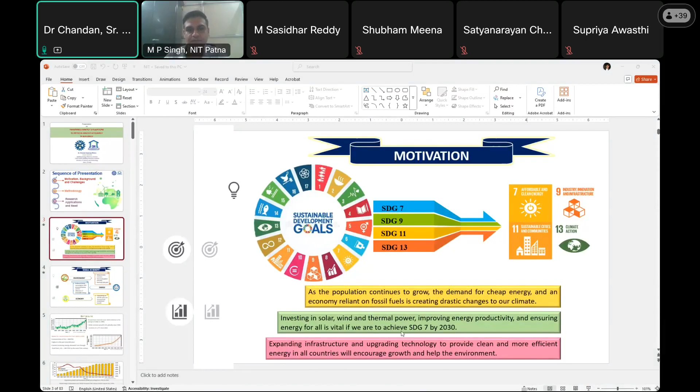Excuse me sir, your slides are not changing. I am on the motivation slide, is it visible? No sir, this is the starting slide only, the title slide. Okay, let me share again, I think there is a problem. It's working sir, but make it full screen. I have already shared, let me make it full screen, I don't know why. Is it visible now? Sir, it is visible. Are the slides changing sir? Sir, you are right now on the third slide, we are seeing the third slide - the motivation part. Make your PPT full screen sir. It is already full screen, let me share the entire window again. I think there is a problem. Okay, no issue, sir.

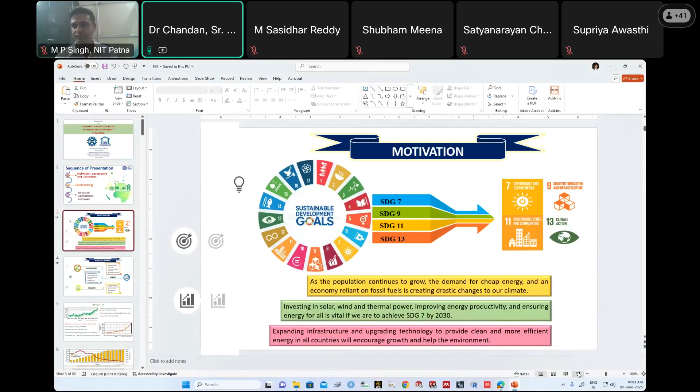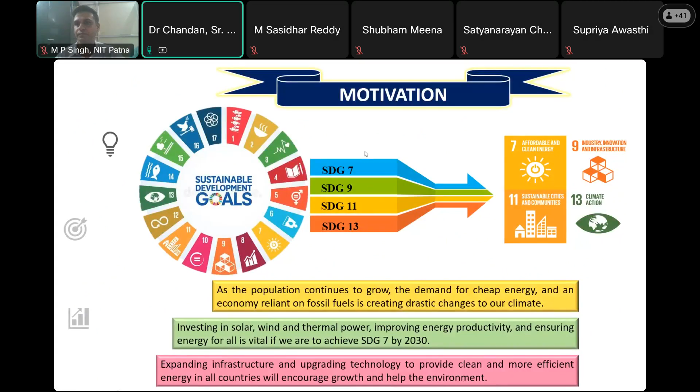So I was discussing the motivation, the area we are working in. Everyone knows the population is growing fast, so the challenges are in meeting energy efficiency and thermal performance of buildings, and how we should design buildings to reduce the heat load as well as the cooling load based on climatic conditions or climatic zones.

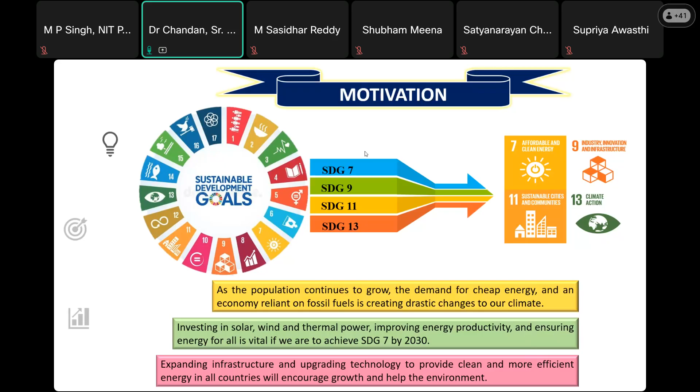These are the basic outlines where we are going. If we are trying to make changes for societal benefits, that will be a great initiative. These are the goals based on which we are working.

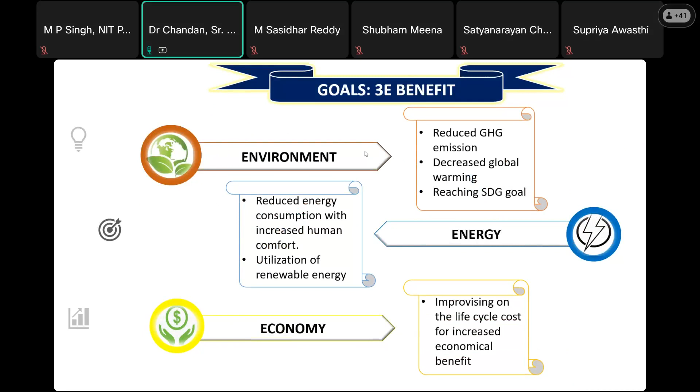That is environment, energy and economy, three aspects which usually dominate societal need. We have to take care of the environment as well as less energy consumption. Whatever appliances we use should be energy efficient, utilizing renewable energy as much as possible, which is also one step towards energy efficiency.

Another is the economy. One can say directly, before using any system, whether it is affordable. A few terms quickly come to mind before buying or adopting any kind of technology: energy efficiency, environment friendly.

In an individual manner, one can think, leave the environment aside because that's the government's duty, they will take care. The point is it should be affordable and energy efficient. Energy efficiency and economy are individual concerns, and environment, so people think, but we should not think like that.

We should also consider the environment aspect so that the building can be holistically designed, because at the start of any construction or building typology design, there is a problem of not working cohesively in the nation's development. Like, architects will design their separate building, then civil engineers will design as per their

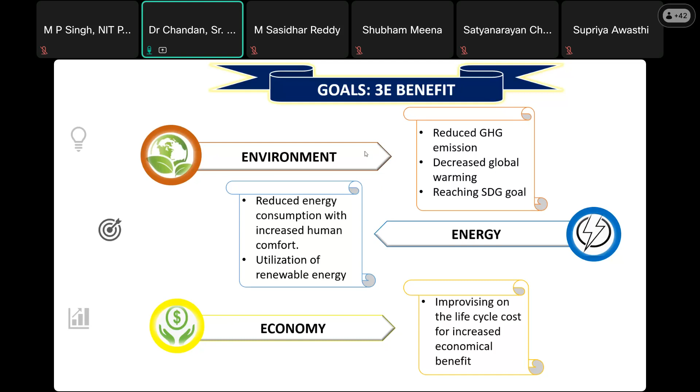codes, IS code and other things like energy, net zero. They will not take care about the energy aspect and environment aspect. So during the initial stage, we should focus on the environment, energy, and economy aspects of buildings.

These are some backgrounds already reported or available in the public domain, some facts and figures. You can see what is the status of our country, or the world as a whole, where we are lying, and if we continue consuming or growing like this, what will be the future consequences.

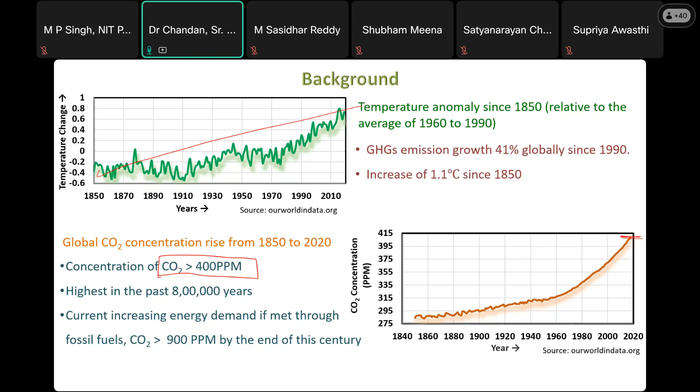All these show us reduction strategies that lead to reduced energy load for buildings, which can be fulfilled through renewable energy systems, leading to net zero energy buildings.

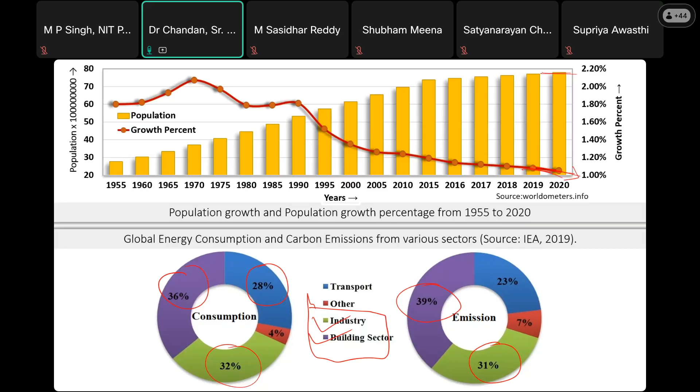So now the picture of renewable energy, because without moving towards renewable energy, we cannot even think about holistically the net zero energy buildings. So the problem is in the house and in the building, or one can say in the industry. So we are taking the domestic household.

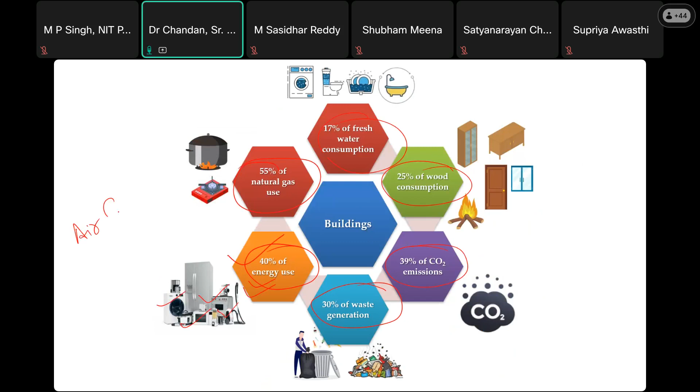One can see here, these appliances are using maximum energy, or one can see air conditioning. Air conditioning also uses 40 to 60% of the total energy consumption.

Let's take one example. In house, we have TV, fans, tube lights, AC, fridge, washing machine, mixers, and other things. So the major contributor of energy, or the major energy consuming device, is air conditioning.

Air conditioning, one can understand: in Rajasthan, air conditioning is cooling the air, and in Ladakh, air conditioning is heating the air. So in both cases, more or less, the energy consumption pattern is maximum in air conditioning. So why is air conditioning consuming this much amount of energy? What is the root cause of this thing?

So why we say that at the initial stage, we should design our building in such a way that thermal comfort in the building is maintained.

So there are two approaches: one is passive and another is active. By utilizing only the passive approach, if efficiently designed, one can reduce up to 30 to 40% excess energy utilization through passive architecture or passive strategies.

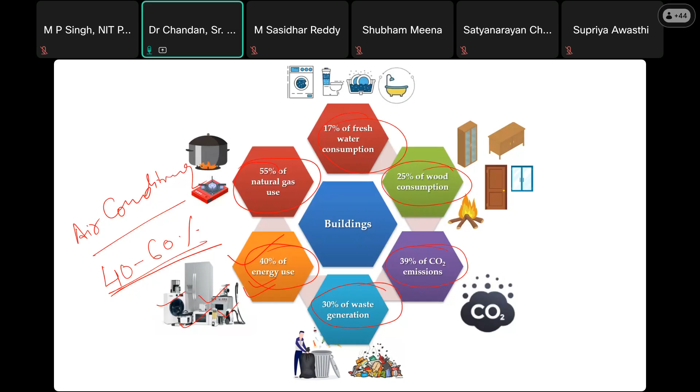This is the energy consumption pattern. I have already discussed residential, commercial, transport, and industry. So residential, commercial, and industry come under the building sector. Buildings we use for domestic purposes are known as residential, commercial, and industry.

But more or less, one can see from the peak that it is because of air conditioning, approximately 59%. That data is sometimes reported around 40. In some literature, it is given in the range of 40 to 60.

Other things one can see: lighting only 12%, refrigeration 8%, washing machine, electronics, cooking, and other appliances. These are minor, because we are intensively using air conditioners to make our space comfortable. In commercial buildings also, refrigeration and water heating are used, also in industrial applications.

But at the same time, this figure also reaches 40 to 60% if we are talking about Leh Ladakh, because there, water heating and space heating are the major contributors.

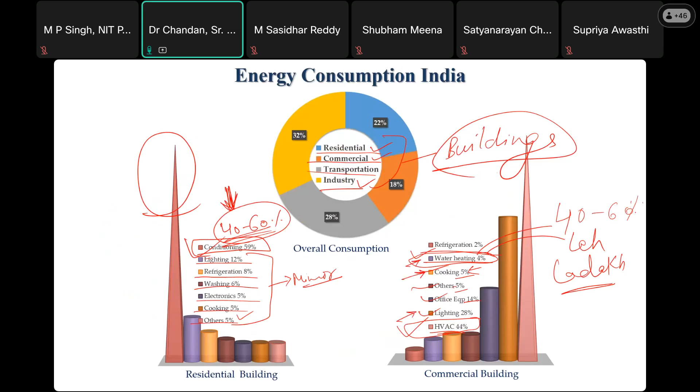But I'm not saying that saturated or energy efficient appliances are available. Still, there is huge scope to work in this area to further reduce cooking energy, water heating energy, and lighting. From previous studies, we are still in a good position to utilize energy related things efficiently.

Nowadays we are hearing about global warming potential, CO2 capture, CO2 utilization, CO2 sequestration, and like that. So how does this entire global warming potential and CO2 influence our building sector, industrial sector, transport, and other activities? How are they contributing?

Being an architect or an HVAC engineer, two terms usually come to mind: embodied emission and operational emission. The embodied emission is from material manufacturing, during the manufacturing of material and other applications, because the final product we see at our site or construction site, it's emitted during that process - how they contribute to global warming potential.

So these are the methods of reduction. At the initial stage, sustainable material. This term sustainable, everyone is using sustainable nowadays. How is this sustainable?

So that kind of material that has less embodied emission during the manufacturing as well as transportation, and the final product, whatever we are using, that should contribute less in terms of CO2. So if some material is using X, the sustainable version should be X minus delta X, at least a significant reduction as compared to the conventionally available material.

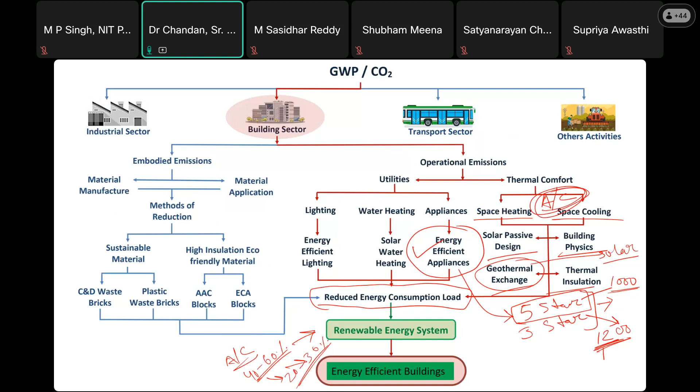Let's come to the fundamentals of net zero energy consumption building, net zero energy building, net zero emission buildings. These are different terminologies, but all contributing towards energy efficiency or NZEB, net zero energy buildings. Somewhere in literature you can find net zero energy building, somewhere you will find net zero emission building. This is more or less if we are able to reduce the CO2 and the energy.

So these both are contributing or helping each other. The other terminology that we have found in reports or journals is written as net zero energy building, but at the end all things are the same - these are not different meanings or different approaches. The total or other things are net zero energy consumption, zero carbon emission. These are the two different aspects that we have to take care of.

So how to achieve zero energy consumption building? What do you mean by zero energy consumption building? If here is the energy, there is the emission or renewable potential - one can see the renewable energy. One can say I am producing this much amount of energy through renewable sources, but at the same time I am also utilizing this much amount. Another person will say, okay this is my graph, I am producing energy from renewable sources this much and also consuming this much.

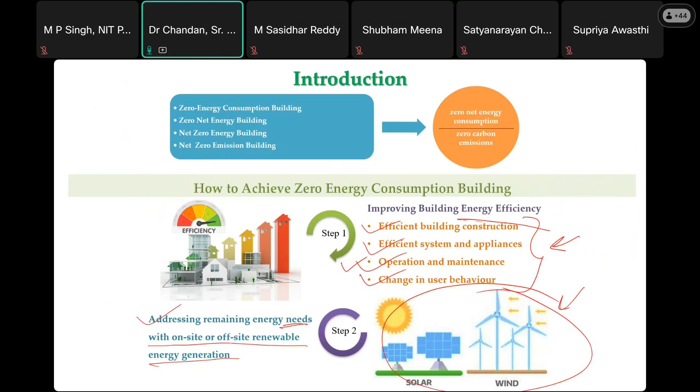So there are two basic steps I'm discussing in this particular slide. That is energy efficiency - efficient building construction, efficient system and appliances, operational and maintenance, change in user behavior. Another thing is addressing remaining energy needs - whatever remains will be taken care of by renewable energy sources. We have to think in such a way so that bare minimum energy is needed for making any kind of building space energy efficient. This is the basic mechanism, or holistic hybrid approach, so that one can make their own house or building energy efficient or net zero energy.

So there are two terms: one is net zero energy building, another is energy efficient building. First we have to achieve this energy efficiency, then we will go for net zero energy building.

So how can we achieve this energy efficiency in a building? Initially, we would apply building physics - what are the fundamentals of buildings, load optimization, how much the building is utilizing or consuming, that may be appliances, equipment, and other things, by utilizing star-rated or energy efficient appliances. That may lead to improving energy efficiency, energy efficient systems, or energy balance.

Energy balance of renewable energy as well as the bidirectional meter. There are so many approaches and appliances coming in the market. They give live data as well as live performance of the building - how it is producing, how it is taking from the grid, how it is giving to the grid, and the entire data management the devices are doing.

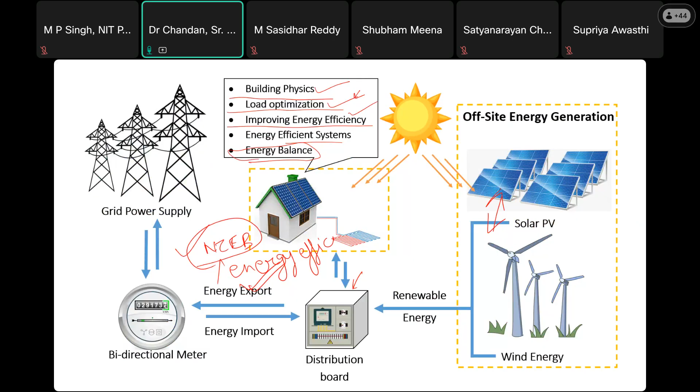So this is the final or holistic approach, one can say the user target.

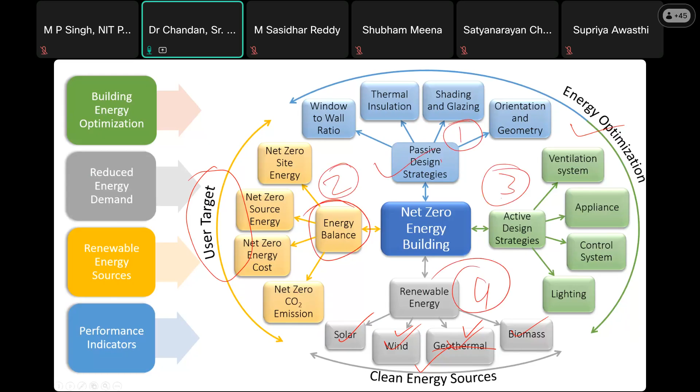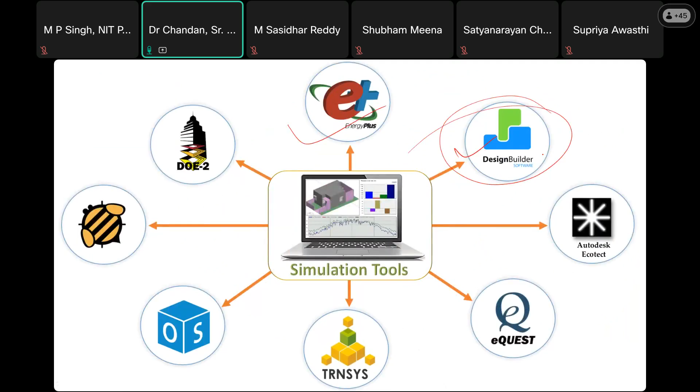There are different simulation tools, as depicted in this thing - some open source, some license based. So I am showing one simulation based on the Design Builder software. This is just a case study, not in depth - I have not shown the details in these slides.

So this is assessing building energy efficiency - how it's Energy Plus based, this Design Builder modeling simulation software. The energy assessing tool enables the user to work with a virtual building model. Complex designs are made easy with the help of predefined templates, so whatever the latest version, it has predefined templates so there's no need to invest much time on this. Predefined building materials are also available, to provide a range of environmental performance data like target energy consumption, carbon emission, comfort conditions, HVAC components, maximum summertime temperature, or daylight illuminescence.

So this is the basic data we have to collect by visiting or doing a pre-need assessment visit - what is the actual need, and how we can predefine design geometry, predefine construction material, heating and cooling design calculations, like that.

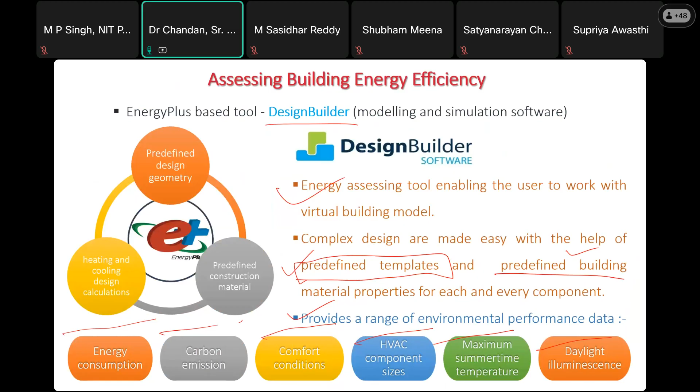So this is the study for campus only. We have data like latitude, longitude, elevation above sea level, climate, average annual temperature, Köppen classification, and ASHRAE climate zone - this is the location we initiated for this case study.

Okay, if we are taking this particular building for improving energy as well as thermal comfort, then what will be the approach? There is a permutation combination - okay, we will add this material in this wall, in this roof, in this floor area, like that. Or what is the orientation of the building, how will this building behave after modifying it. So before going for actual changes on site, what will be the approach?

How, if one will ask civil engineers, okay, which kind of insulation will you use - there is different thermal conductivity, defined thermal conductivity, U value of any sandwich panels. In CBRI itself, we have this thermal conductivity testing facility.

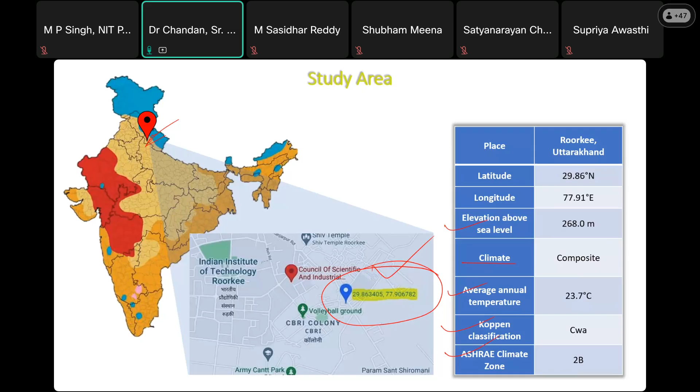First thing is site selection. Sites come under cold climate, warm and humid, hot and dry, and temperate and composite categories. If we consider Roorkee as a site, then that comes under composite climate.

Next is model preparation, basic design models. This will be the existing model, if we are going for the repair and retrofit.

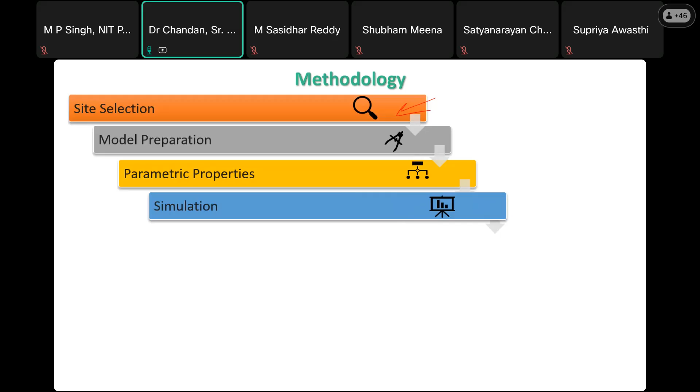Parametric properties determine which parameters will be affecting the design. Then we go for simulation, which sometimes directly gives a good combination or tunes the results with the existing one, and sometimes we have to modify it and try to improve through trial and error. This is the iteration in different properties.

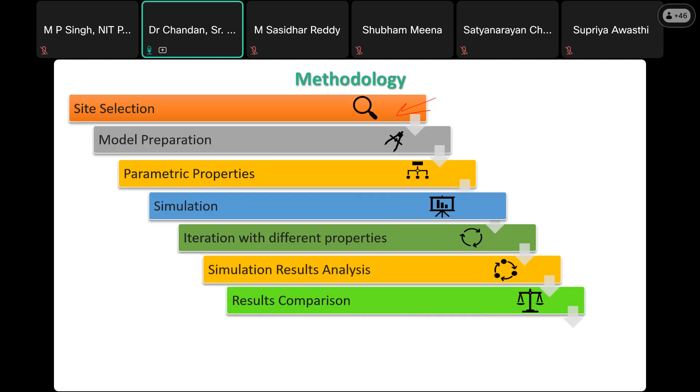Simulation result analysis - one should know how this part is done, because it is critical, and interpretation is also very important. We look at what the simulation shows versus the actual results. We have to validate our model against at least one predefined study for result comparison, and only then can the best outcome and improved energy efficiency be achieved. This is the methodology part, how we can go about it.

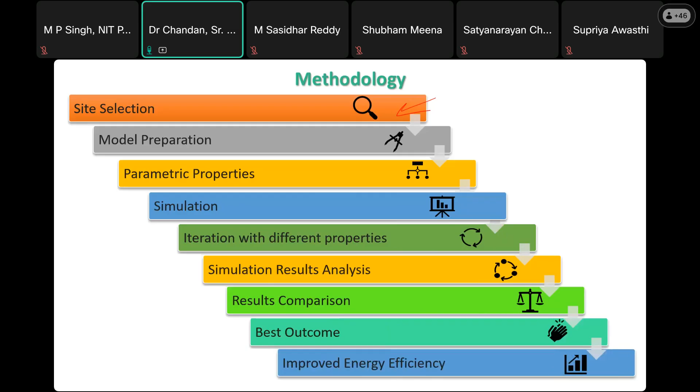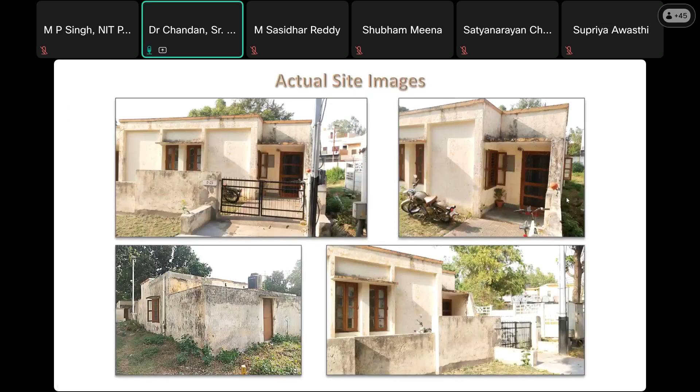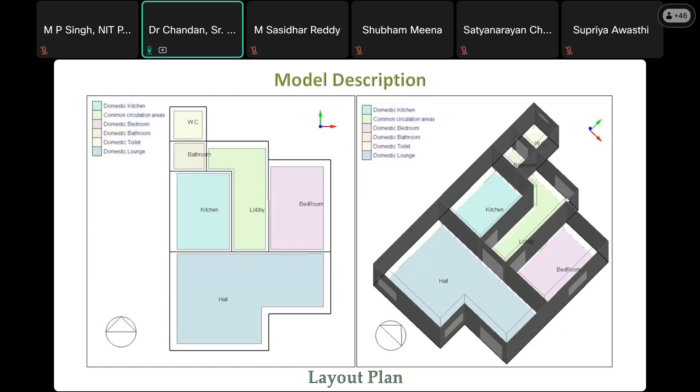We prepared this model description. This was the domestic kitchen and common circulation area, domestic bedroom, domestic bathroom, domestic toilet, and lounge. We placed other elements and created the model with the existing material, what kind of material is being used, and designed the model in Design Builder, including orientation, facade and other placements.

This quarter is placed together in a line with so many other quarters. So we designed based on the color combination and the actual thing - the floor has tiles placed in it, along with the roof, wall, and other elements.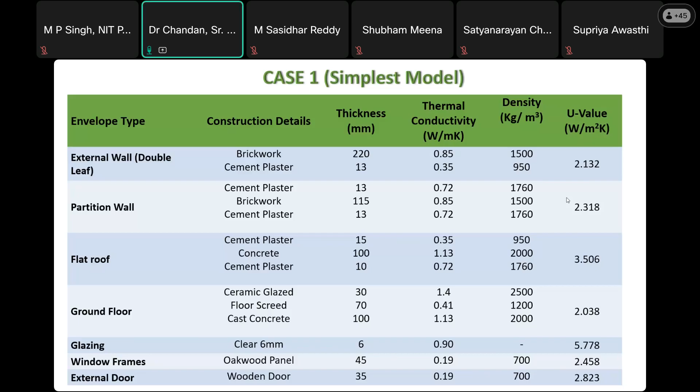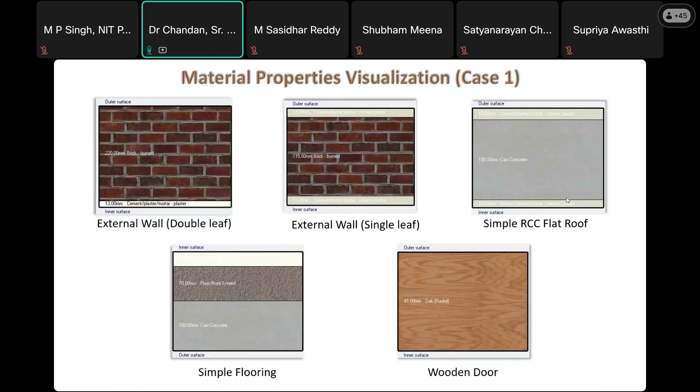These are the material property visualization for the case study. We tried to replicate the similar pattern in the simulation so it can be understood easily - external wall double leaf, external wall single leaf, simple RCC flat roof, simple flooring, wooden door. This was the rendered output of the case.

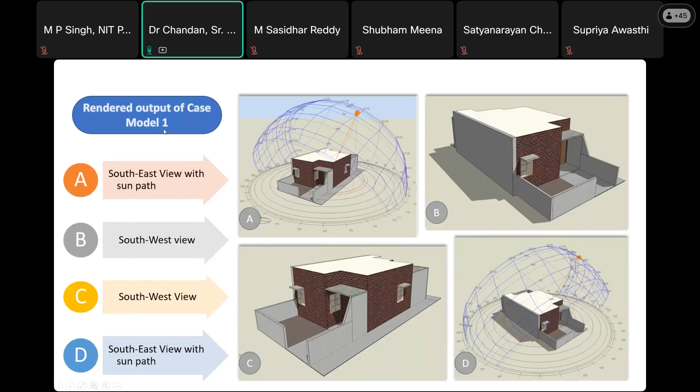Southeast view with sun path, southwest view, southwest view with or without the sun path - this is the sun path diagram created. This is the conventional model, which we modified with a few details. So this is the case study.

After the second modification, this was the second table, showing the conventional building model, with the parametric properties that are different in case 2 model highlighted from the previous model. So this is the conventional model, case 2.

As already discussed in the material visualization, the changed components shown here include the external wall of simple brickwork plaster, both faces with cement sand plaster. The roof is changed to reinforced concrete slab with cement plaster on the inner face and a layer of bitumen, mud phuska, concrete tiles, and cement plaster on the external face. The ground floor has an extra layer of brick slip and clay underfloor, with stone marble laid as the topmost layer.

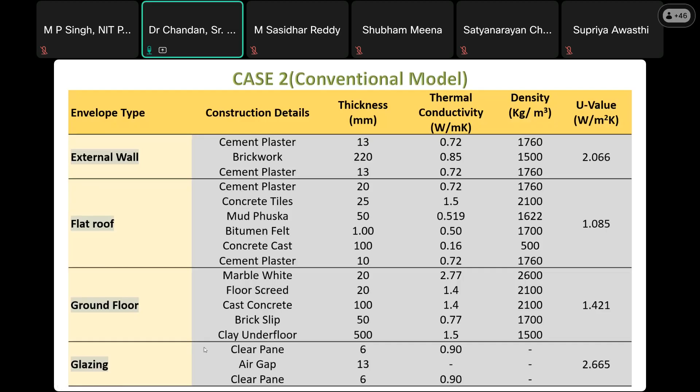So the window glazing in this model has changed to double glaze with 6 mm clear glass with an air gap of 13. Why have we put this air gap? Because air will work as an insulating material. Previously architects used to construct this rat-trap bond in which approximately 20 to 30% material saving also takes place. So like that, this is the case 2.

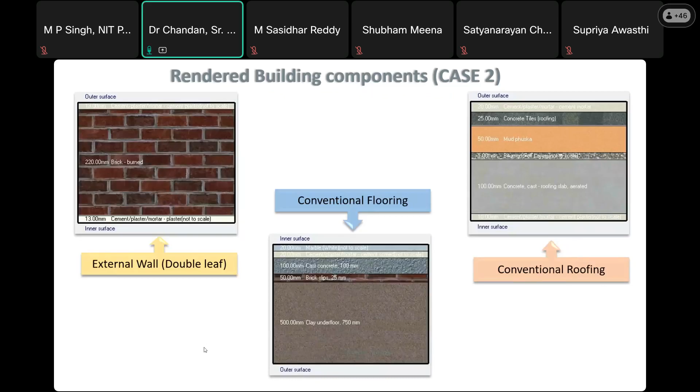We can see in the rendered images the external wall, double leaf, conventional flooring, conventional roof. Further, this was the rendered model of case 2, showing how it was improved.

This is case 3. In case 3, an additional layer of expanded polystyrene is added on the wall's outer face to provide insulation and reduce thermal transference. For this reason we added the expanded polystyrene, and in the roof section a layer of insulation with lower thermal transmittance is added to reduce the heat effect through the roof system.

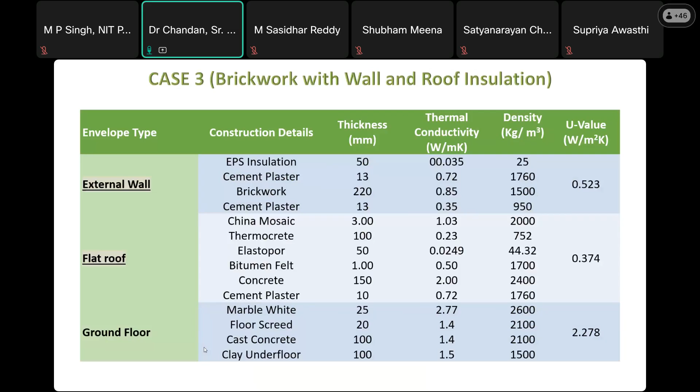You can see how we have step by step improved and checked the feasibility. So for the result analysis, the main thing I already discussed in the previous slide: interpretation and result analysis is the important part so that we can get efficient or good results. What is our purpose? Our main purpose was CO2 emission reduction as well as energy optimization. That was the main target.

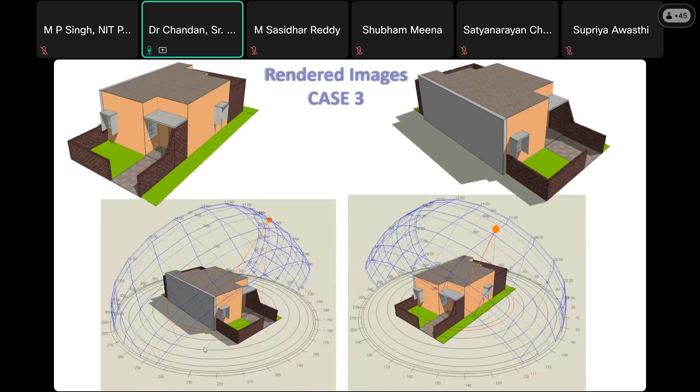So this is case 3. This is the rendered image of case 3, showing how we changed insulation and other things. In the rendered image one can see a difference in the color and flooring pattern and other things. At the end we further improved by adding brickwork with insulation inside it also, to check whether it will work or not.

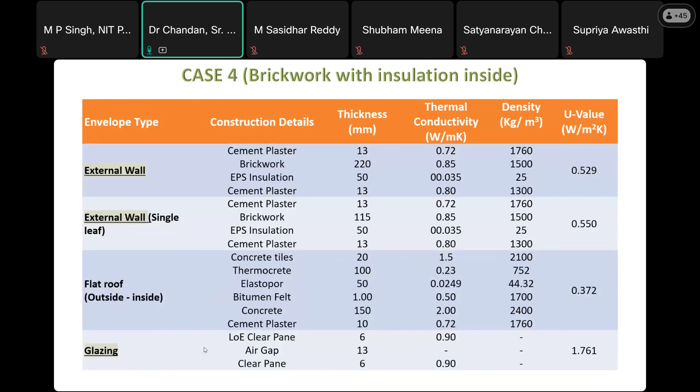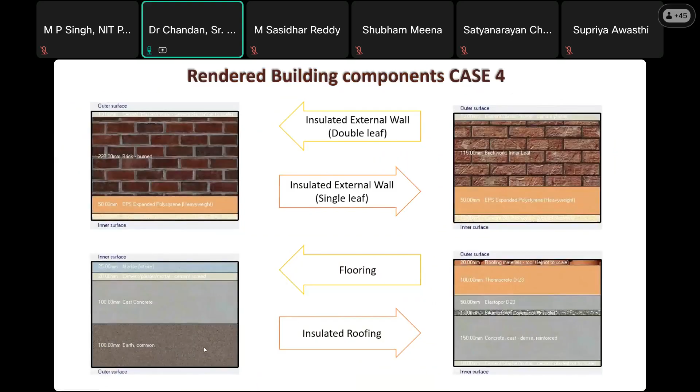So this is the rendered building component, case 4. These are rendered building images, case 4. This is case 5 - let me explain the case 4 part. In case 4, the insulation is provided at the inner face of the wall, to analyze the change in the thermal behavior of the wall by changing the placing of the insulation layer.

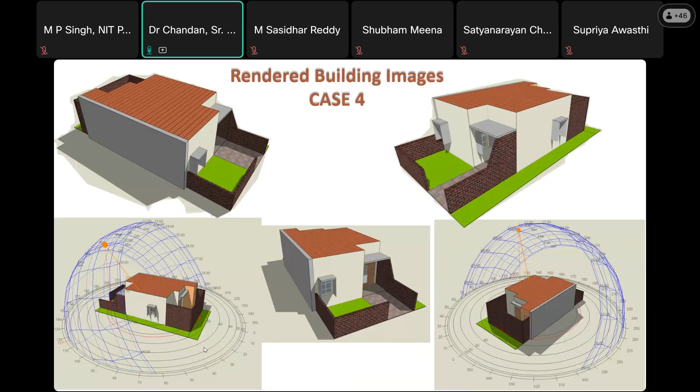In the roof section, the topmost layer is changed here to concrete tile. And in this model the window glazing has been changed to double glazing with 6 mm glass on the exterior face and a 6 mm clear pane. This gives a low emissivity effect due to the glass, which minimizes the amount of infrared and ultraviolet light that comes through the glass, without minimizing the amount of light that enters. So like that, we changed this in case 4.

Further, we also analyzed through simulation case 5. In case 5, the brickwork is changed to AAC, with no insulation layer, to see the effect of reduced thermal transfer using AAC block in the building and an insulation layer of EPS. Similarly, this was added in the floor and below to lower the heat transfer from the ground.

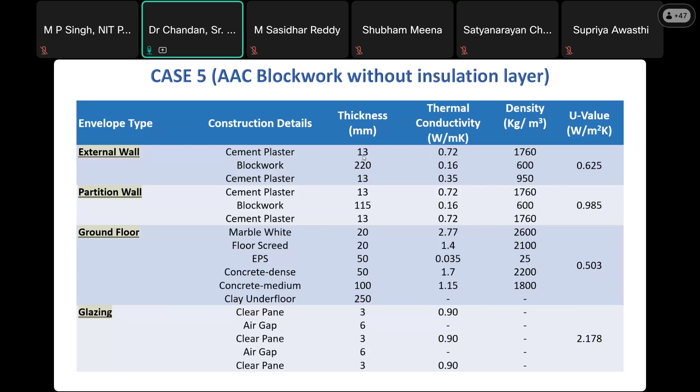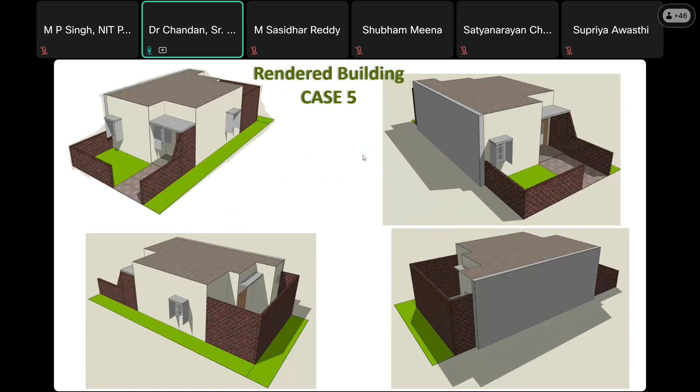And the glazing has been changed to triple glazing, 3 mm clear glass with 6 mm air gap. What is the effect of this glazing? So these are the different things we have tried - case 5, this is the rendered image of case 5. And likewise case 6 also, with external wall A and external wall B. This is a rendered image.

In this, the only modified parameter is the added EPS insulation layer to the blockwork on the wall's outer face, with lightweight cement plaster on the outer face and gypsum plaster on the inner face. One can see the color also changes based on the predefined parameters in this.

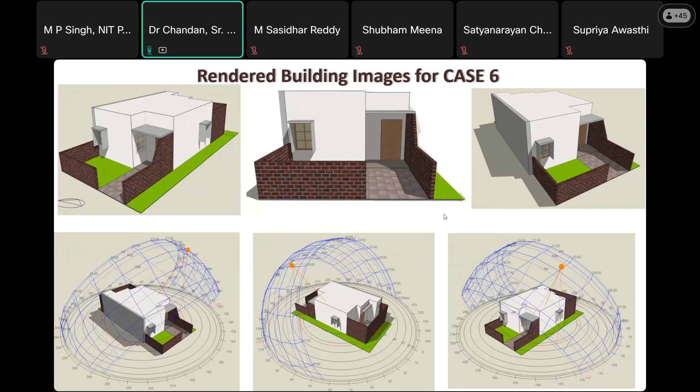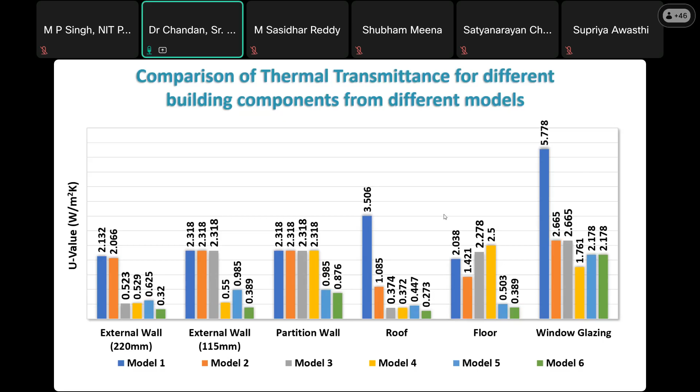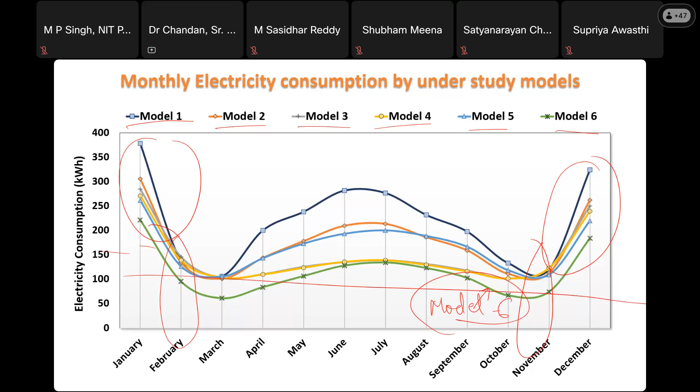So one can see definitely this energy consumption pattern of model 6 is consuming less energy. Similarly, we have also analyzed different parameters, like the effect of carbon emission comparison for the under-study building models, and what other things are affecting buildings.

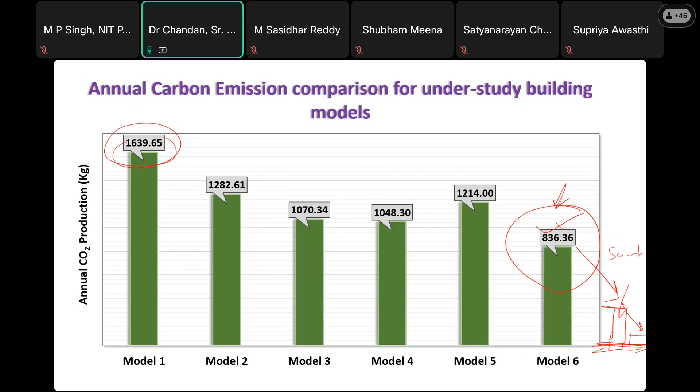So why are we not going for this kind of study or scientific intervention before designing? We are usually going with glass. In Rajasthan, placement of glass is not energy efficient, because glass has the thermal property that only allows short wavelength to pass, and it works as a barrier.

It will not allow the long wavelength to go back out. As wavelength and temperature are inversely proportional, short wavelength has high temperature and long wavelength has low temperature.

One can feel this in a car during peak summers: if you leave the car in open space in the daytime around 2 or 3, then even after traveling 100 kilometers with full AC, in a minute or so, it will be much hotter than outside.

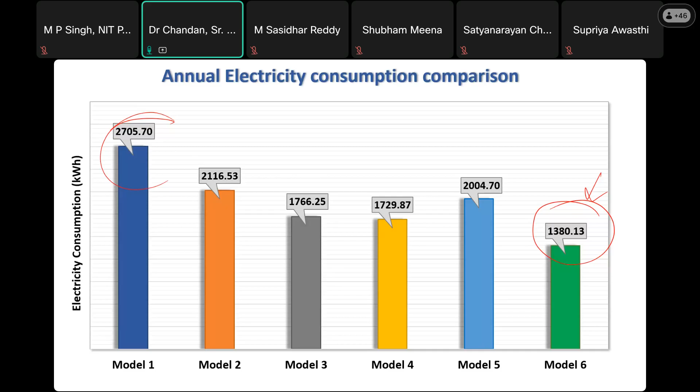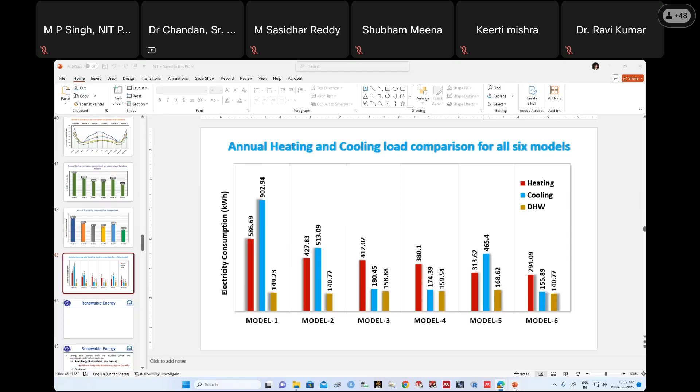This is the annual heating and cooling load comparison for all 6 models in terms of heating, cooling, and hot water heating demand. DHW represents domestic hot water, heating, cooling, and domestic hot water combined. One can see the major contributor: in composite climate and warm and humid or hot and dry climate, cooling dominates, while in cold climate, heating dominates. Slight changes in numbers may occur, but the pattern will be similar.

This is the annual heating and cooling load comparison for all 6 models, in which model 6, with slight modification applying one layer of insulation on the roof, reflective tiles, insulation, and change of glasses, significantly reduced the cooling load from 900 to 155. This is fundamental—by doing this trial and error method, one can improve the performance and energy efficiency of buildings.

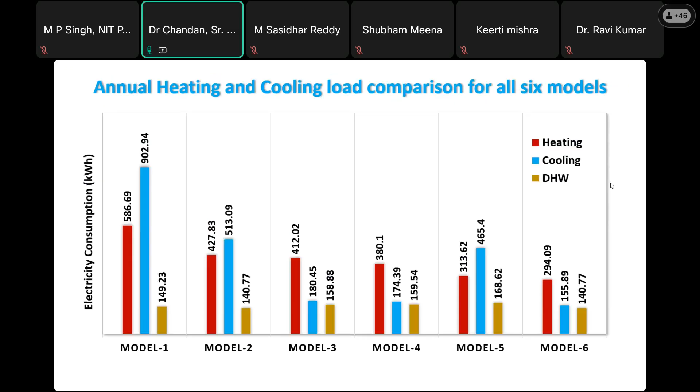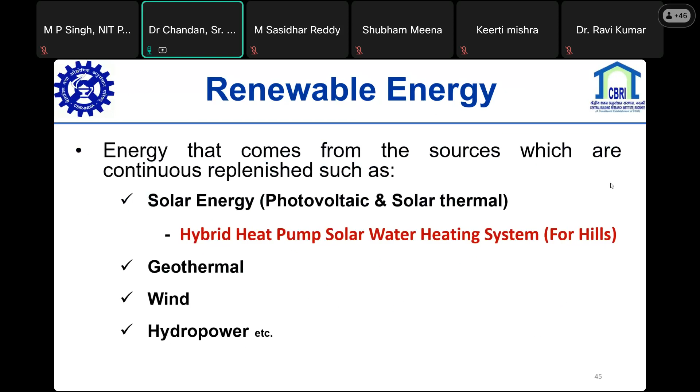Now, if we want to reduce further from 155 kilowatt hour annually, what approach should be used? That is renewable energy—energy from sources which are continuously replenished, such as solar, geothermal, wind, hydro, etc. The utilization of hybrid or renewable energy resources will be based on the location and the renewable energy potential in that particular location.

This is the basic fundamentals of how we can integrate—this is the architectural point of view, and now HVAC or mechanical parts come into the picture. Hybridization of this kind of system will further improve energy efficiency toward net zero energy. Without renewable energy, only architectural point of view or only HVAC efficiency will not be able to take us from a conventional building to net zero.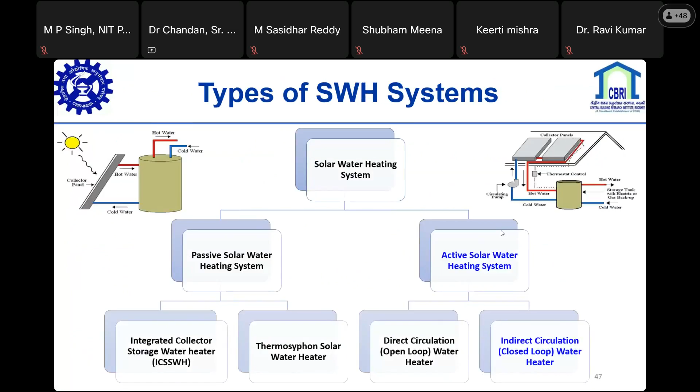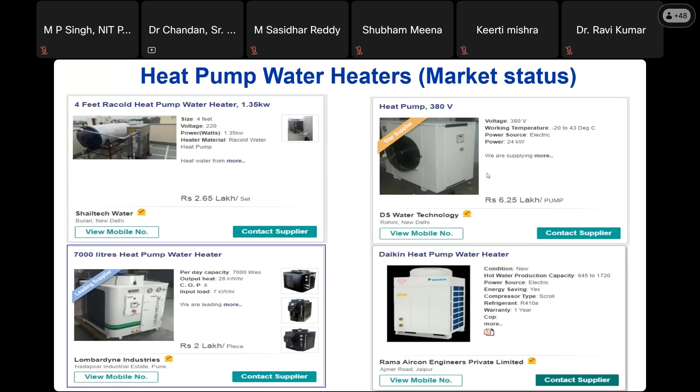This type is particularly for Leh Ladakh, not for any other climatic zone of India. We are working to provide a building solution for Leh Ladakh itself. Here one can see the market rate of unit water heating products. We worked over the last few years to reduce the energy as well as price and improve the energy efficiency.

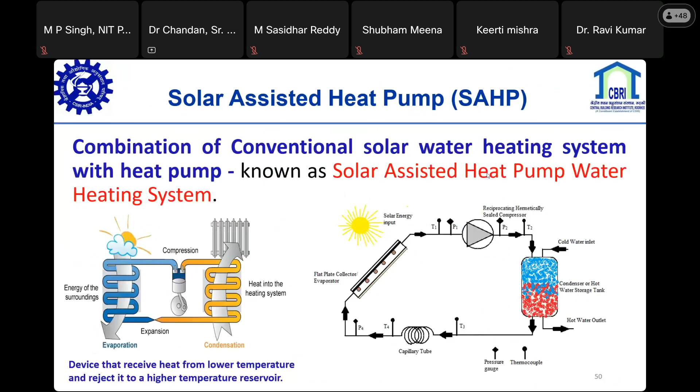This is the modified system we have prepared—a solar assisted heat pump water heating system. A heat pump is a mechanical device that we integrated with the renewable energy source. This is the working principle.

The main thing is the system we designed will work if solar radiation comes in the range of 3.0 to 5.0 kilowatt hour per meter square per day, according to NREL data. Our system will work very fine if the solar radiation is up to 3.5 or 4 kilowatt hour per meter square. This is the mathematical model.

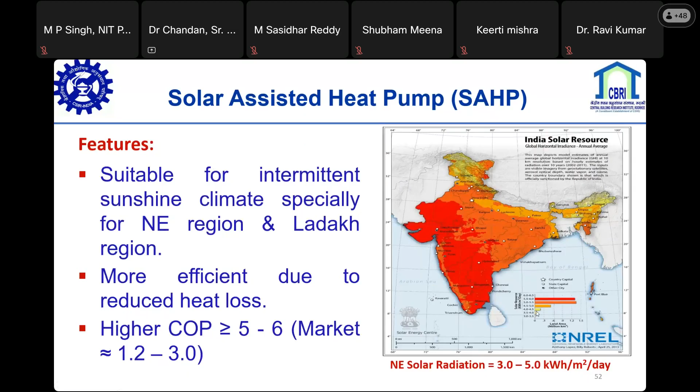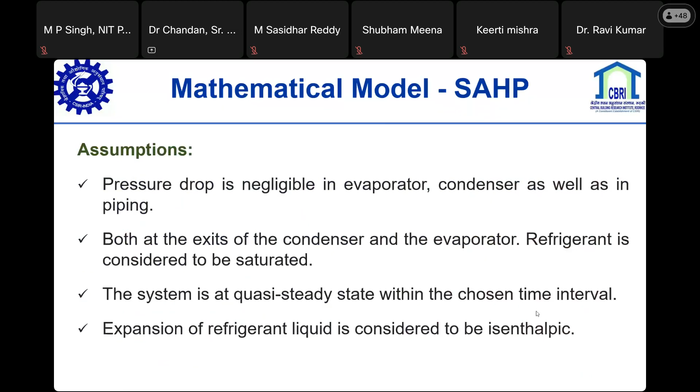We assumed pressure drop is negligible in the evaporator and condenser, because in real performance as well as mathematical modeling there is a gap in the final results. We used ideal condition assumptions—pressure drop negligible in evaporator—but this is not the actual case in the field, so we have faced different challenges.

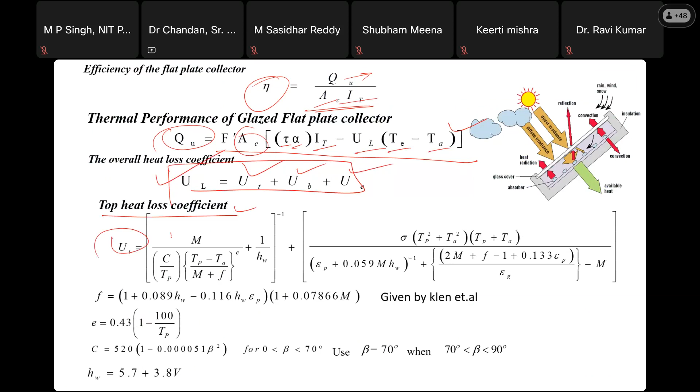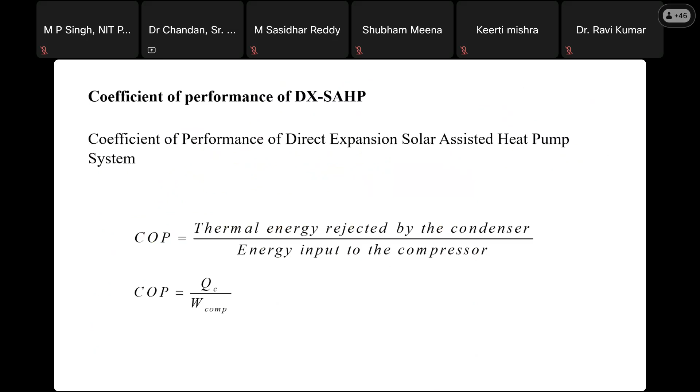These are different equations that I am not going to discuss in detail. This is simply COP, the thermal energy rejected by the condenser—very basic, like a bachelor's or master's degree course. But these are the different components of the setup.

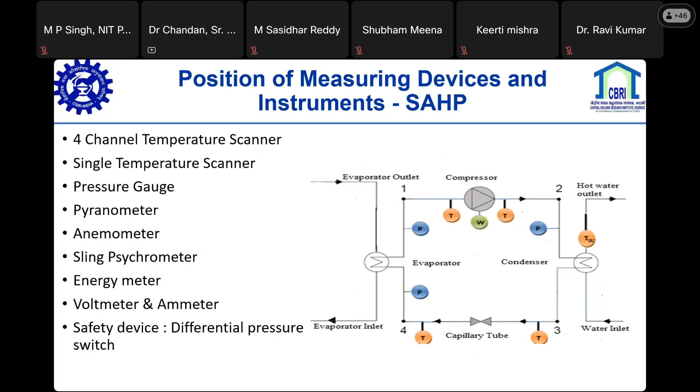This is the positioning of measuring device instruments—how we have set up and modified this system. We tested it in our lab, a guest house that is entirely a bamboo structure. To make this visibly good, we have painted the exterior walls.

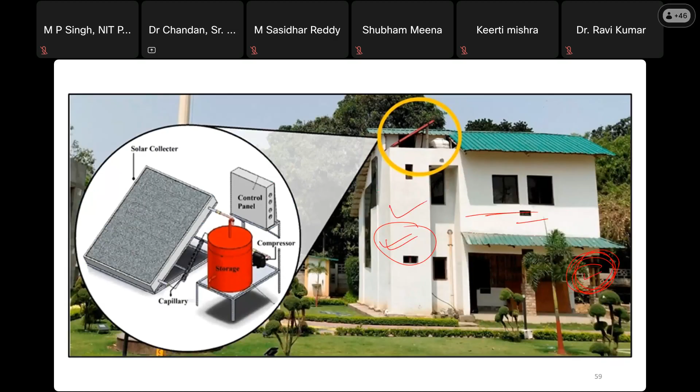One can see here—this is entirely a bamboo structure, column and other things too. The entire building is made from bamboo, and that's where we utilized the renewable energy. Hopefully in the next lecture I will discuss the renewable energy potential in buildings. Thank you.